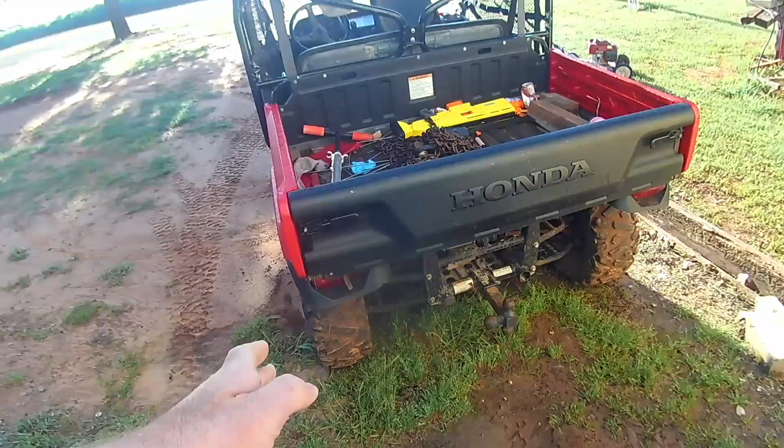I've noticed this thing is pretty top heavy, and if you look, it's not very wide. You could really use some spacers and some wider tires, and it's tall. So these are built more for pipeliners and actual field work. These aren't for racing or anything silly.

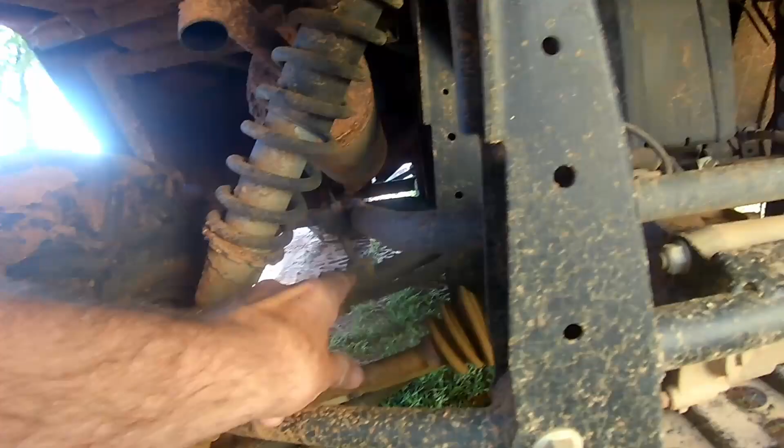But it does get a little top heavy, and I was looking in the manual, just looking over how the suspension's built, and then I noticed this. We got a broken sway bar link. That'll definitely do it. This one is actually not adjustable suspension either, so it's pretty well stuck where it is. You can build lift kits and things like that, but these are overall pretty good. Four-wheel independent suspension, pretty nice.

Okay, so here's our service manual for the Big Red that we're working on. This covers from 2009 to 2012 when they were made. It's the MUV 700. All right, so we needed to look at the wiring harness, and that's going to be number 25 here.

We also wanted to look at oil, where it is, where you check it, what kind you use, all that. So that's going to be up here on engine, and we'll go on to lubrication. Also, number 4 here for maintenance. So let's start with maintenance, number 4.

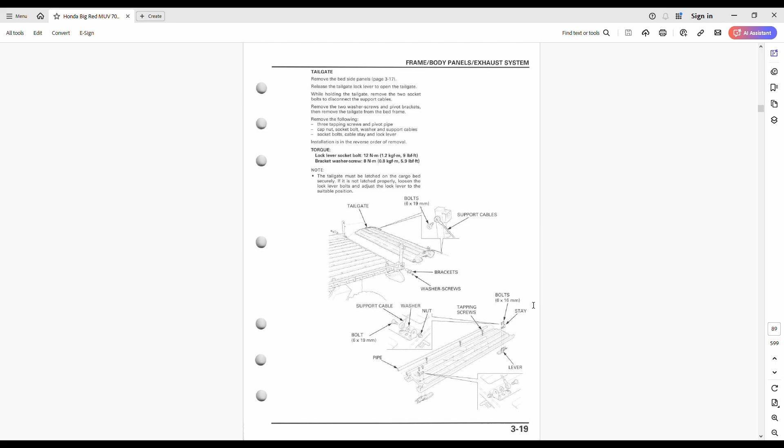And here we are, number 4, maintenance. Fuel line, air cleaner, spark plug, I mean everything's in here. So we'll go to 4-12 engine oil. And boom, here we are. This tells you right where to check the level, shows you where the dipstick is and the oil filler cap, and what it recommends. So viscosity 10W30, 0W30, depends on where you live.

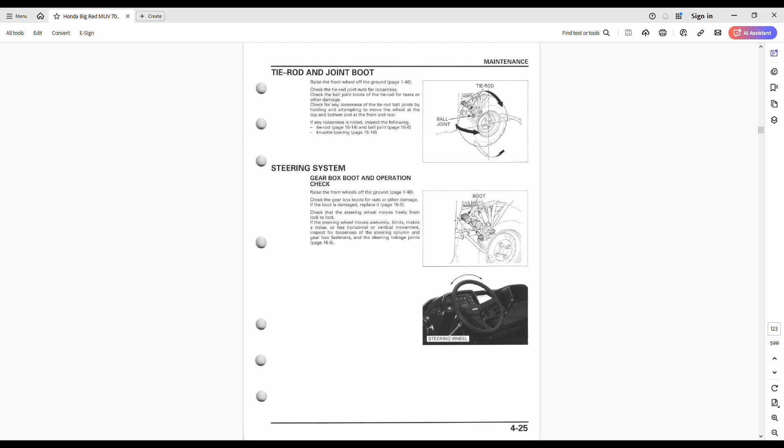So that is nice and quick, and it gives you a maintenance sheet. I mean, there's everything in these. This is where your drain bolt is, there's your filler cap. This all works out really well. This is nice. Crankcase, rear final gear case, it's got them all in there. So then you can go down and check on your wiring, which we said was 25. So let's get down to 25.

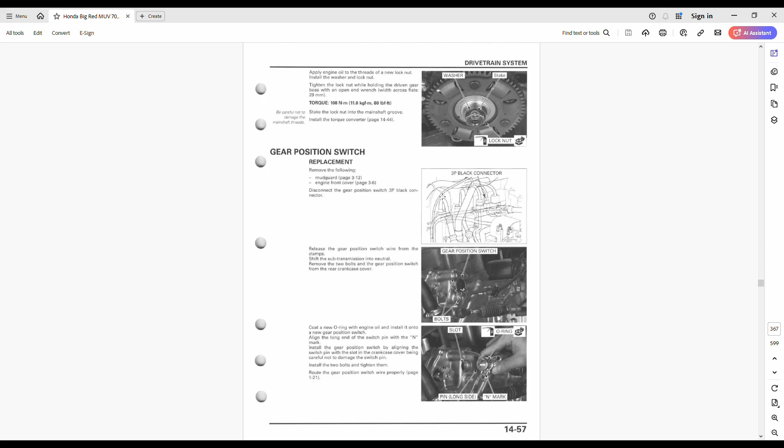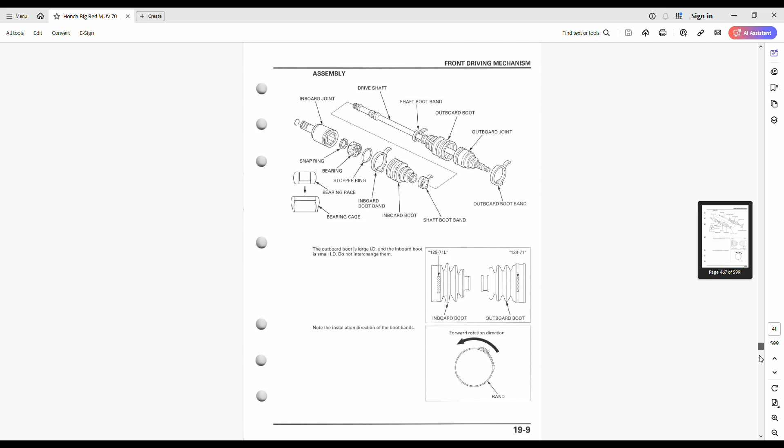Wiring diagram 25. So let's head down to 25. All right, so here we are, wiring diagram 25. Oh man, look at that. If you're good at schematics, this is perfect for you. Troubleshooting. This is good here. If you're having trouble starting it, lack of power, so on and so forth. All this stuff is really good.

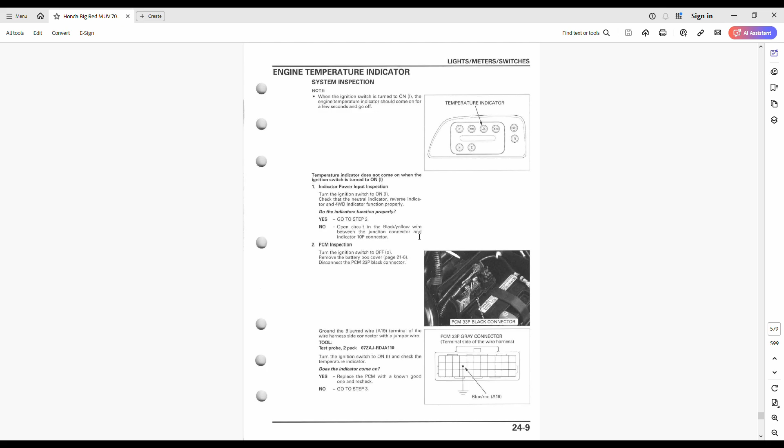So this entire, here we go. Here's a bunch of the wiring. This shows you what connectors go where, lights, meters, switches, engine temp indicator. This tells you where everything is on it. Brakes, taillights, the whole nine. Everything is in there. What size you use, specification. This is a real deal manual.

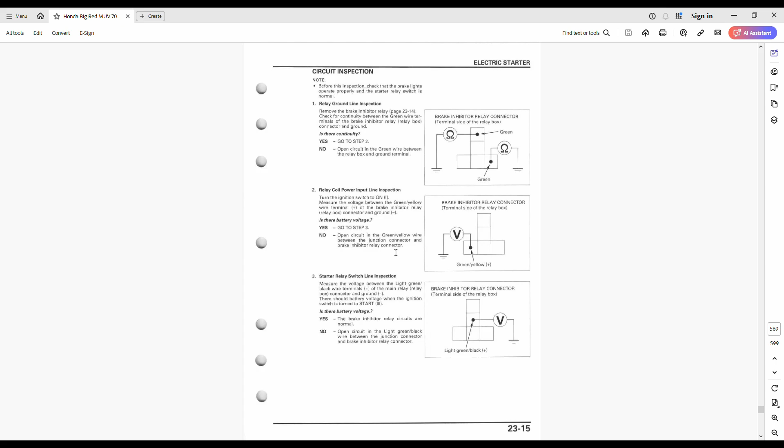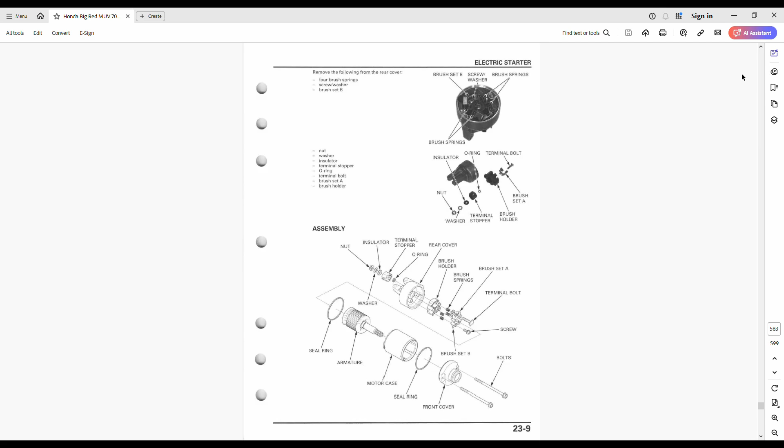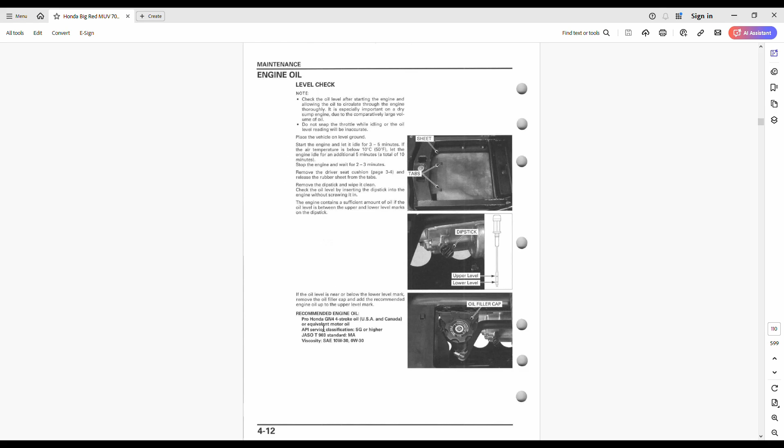Here we are. Number 4, maintenance. Fuel line, air cleaners, spark plug, I mean everything's in here. And boom, here we are. This tells you right where to check the level, shows you where the dipstick is and the oil filler cap, and what it recommends. So viscosity 10W30, 0W30, depends on where you live. There's everything in these. This is where your drain bolt is, there's your filler cap.

Looking on emanualonline.com, figured out that we come in here, we got to lift this seat up. Oh.

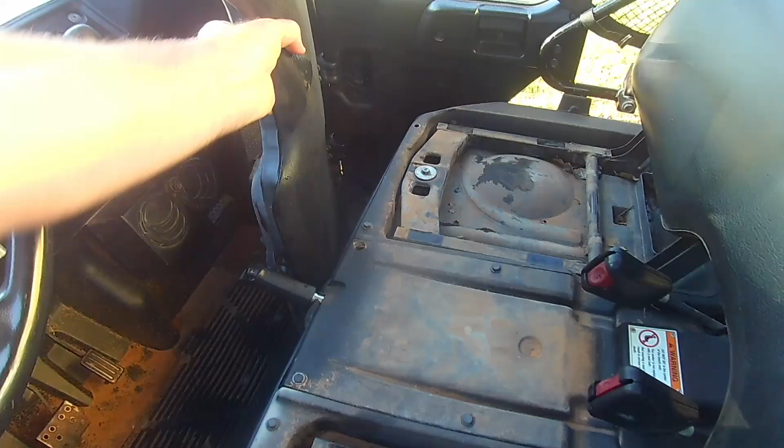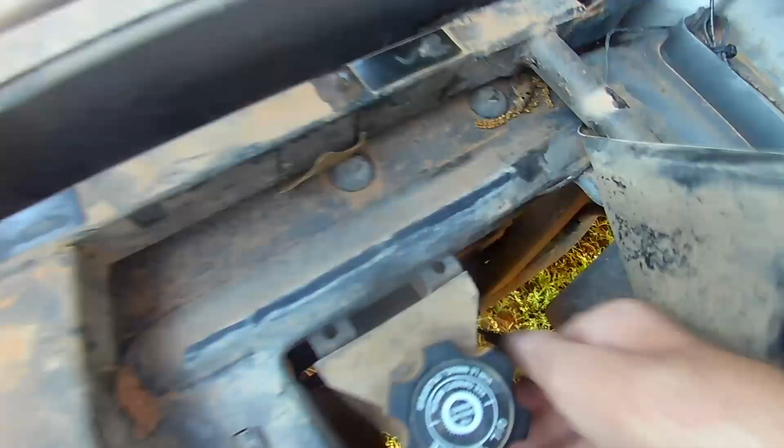Take it on out of there. And underneath this driver's side flap, here's where we add the oil. Right down there is the dipstick for the level. It doesn't look very good, and it is extremely low. So we need to get some oil in it.

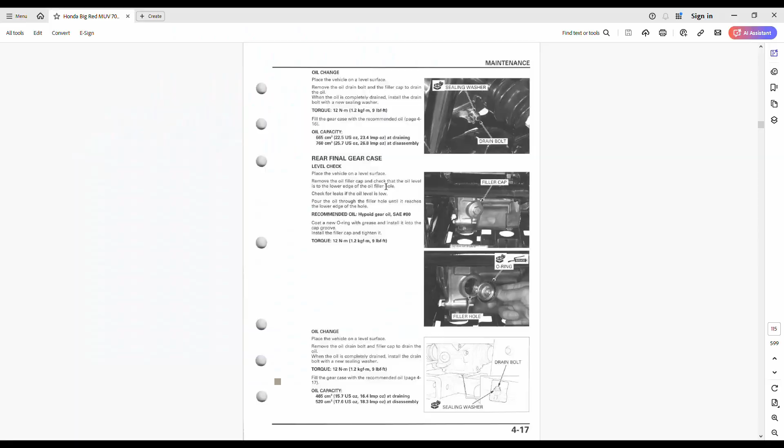And on the emanualonline.com manual that you can download, it tells you exactly what kind of oil to put in it, how much, so on and so forth. Crankcase, rear final gear case, it's got them all in there.

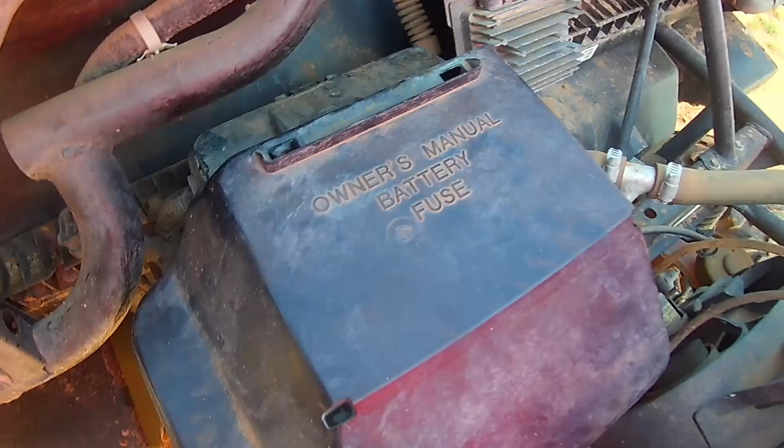So then you can go down and check on your wiring. So go ahead and lift the hood up on it. Battery and fuses in here. And what we've done is tape up this mess that was chewed up by rats. This thing sat so long that rats were actually living inside here. And we pulled everything out, we cleaned it, saw where they chewed on it. All we did was tape it up.

So by going on the manual, I can look at each of these and see what harnesses we actually need and don't need, and you can just order the specific ones. Also, here's your diagnostic tool. You got to pull this cover off. If you have a diagnostic tool, you can scan it, or there's ways to run like a jumper wire, but I'm not sure where you read exactly where the code comes from.

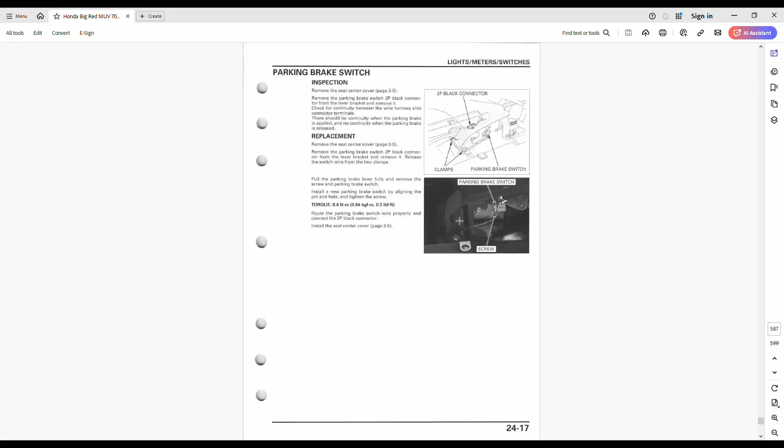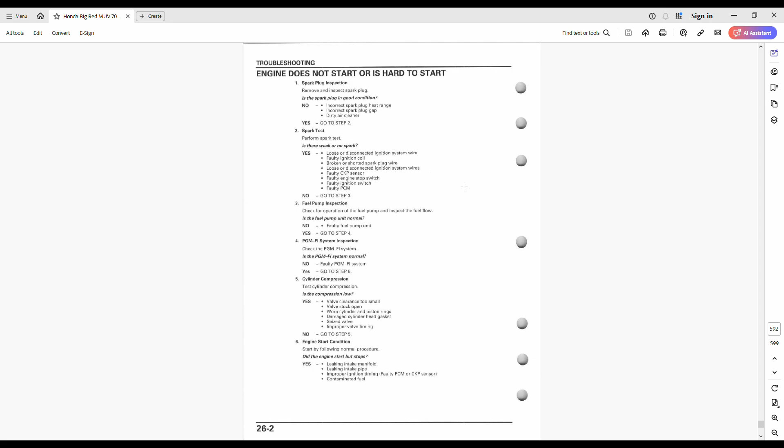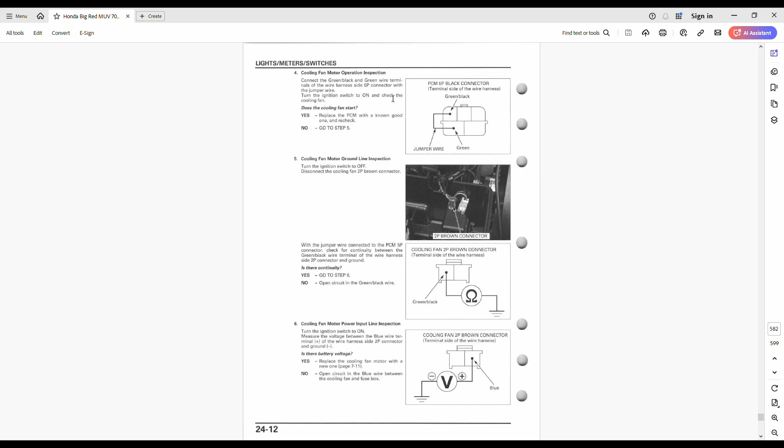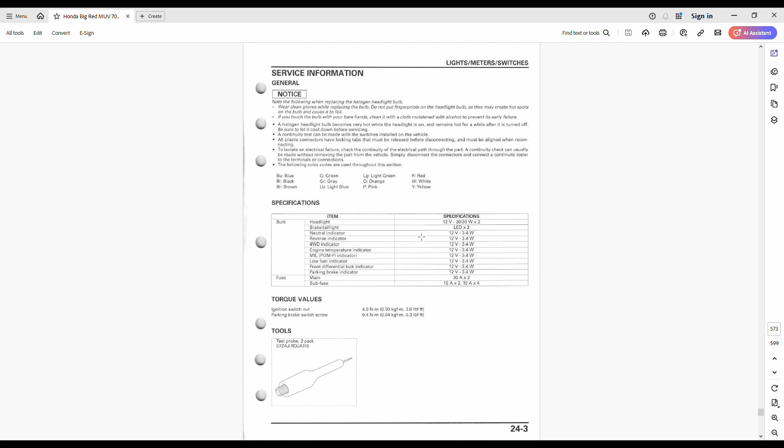So this entire, here we go, here's a bunch of the wiring. This shows you what connectors go where, lights, meters, switches, engine temp indicator. This tells you where everything is on it. Lights, the whole nine. Everything is in there. What size you use, specification. This is a real deal manual.